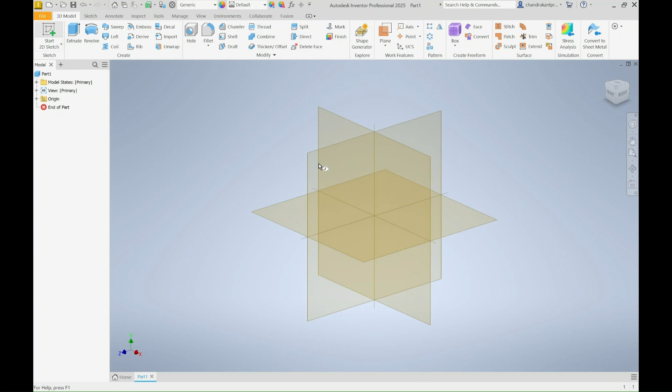We will start from here. First of all, we will make its base 40 and 60. Start sketch. 2-point rectangle. 40. Sixty. Enter. Zoom out.

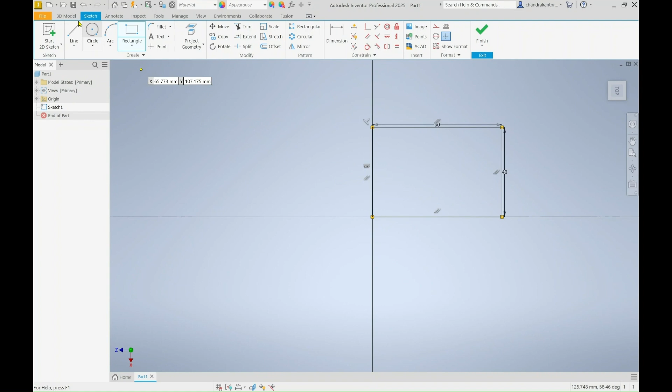Now we're going to extrude it. For extrusion, it's 10 mm. Now we have to make this at the center 40 by 40 square.

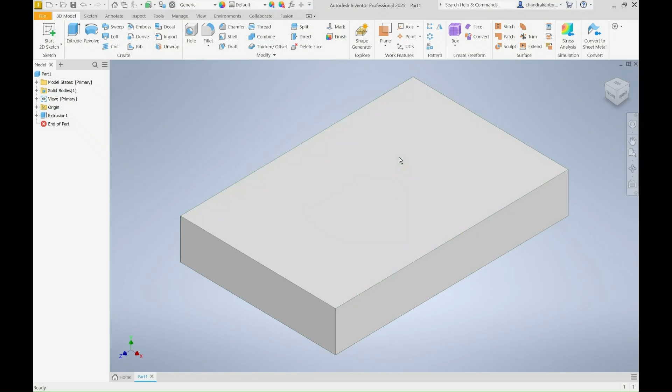Pick this plane, create new sketch, two-point rectangle. Just make a rectangle first of 40, tab 40. Now take general dimensions, take this, zoom in. It needs extrusion of 20.

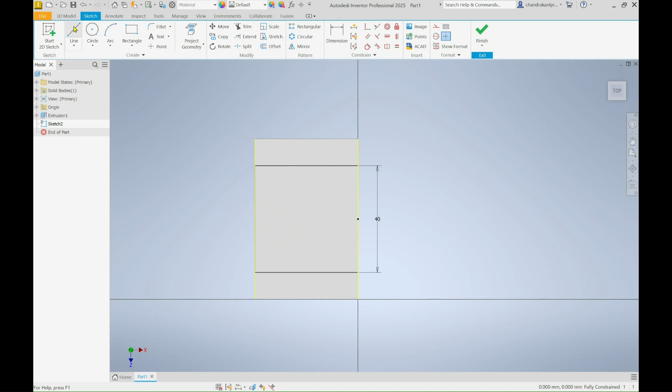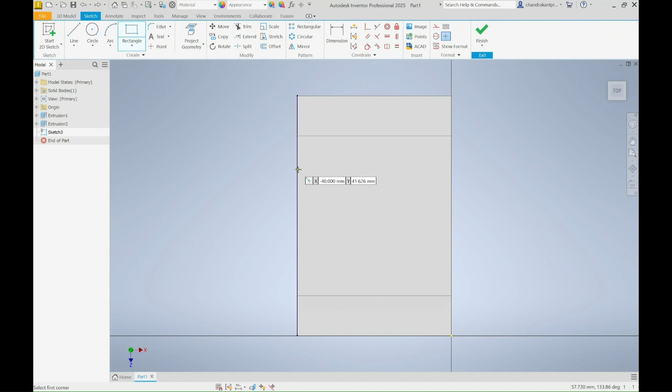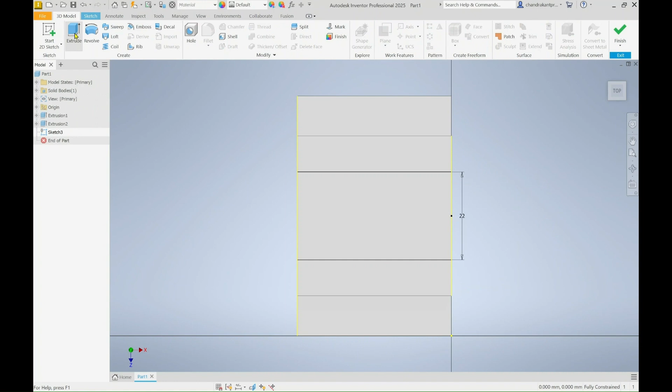Select this plane, create sketch, tab 22, enter. Okay, take dimensions, make this into middle. Extrude, cut. We are going to cut this 15.

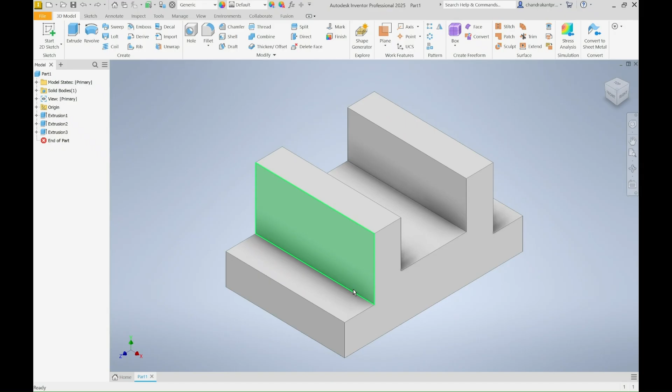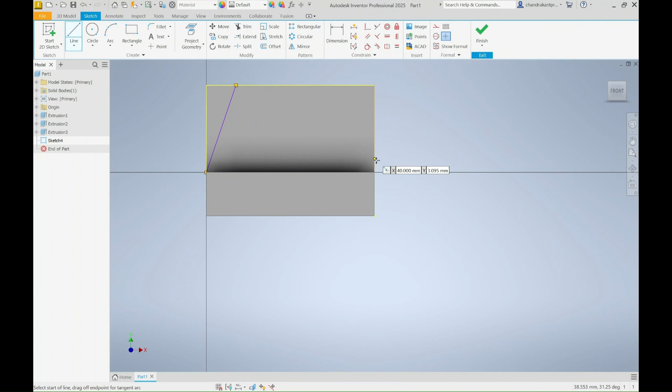Now we can make these cuts, we'll just simply place here and here. Okay, start sketch. First of all, we are going to project geometry this and this. Okay, take a line, take the dimensions from this to this, it's 10. From this to this, it's 20.

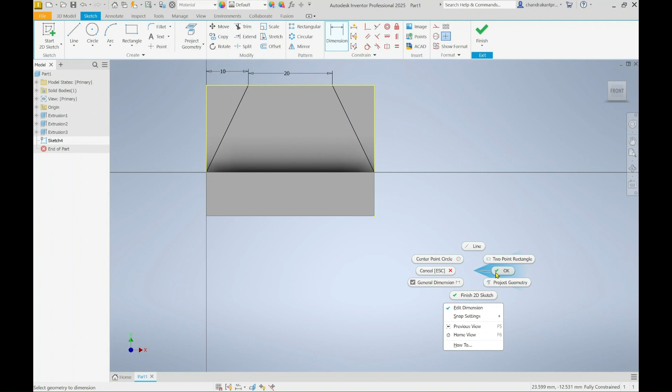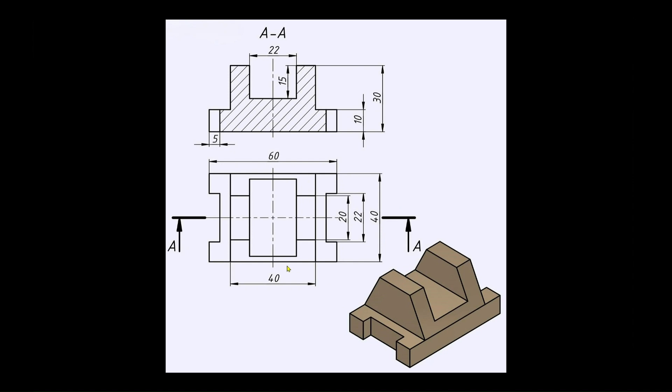Okay, now we'll choose extrude. We will take this and this, cut this, take through all, and it's done. We're going to take this cut also. It's 22 by 5 mm. Okay.

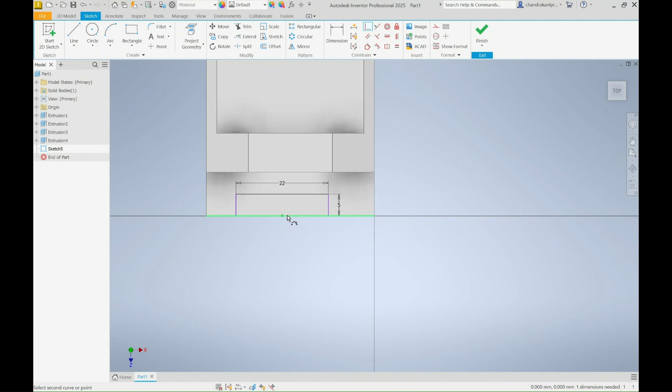Take 2-point rectangle, 22, tab, 5, enter. Take this tool, coincident constraint, again, okay. Go to 3D model, extrude, cut, through all, okay. And now we don't have to do all steps from this side.

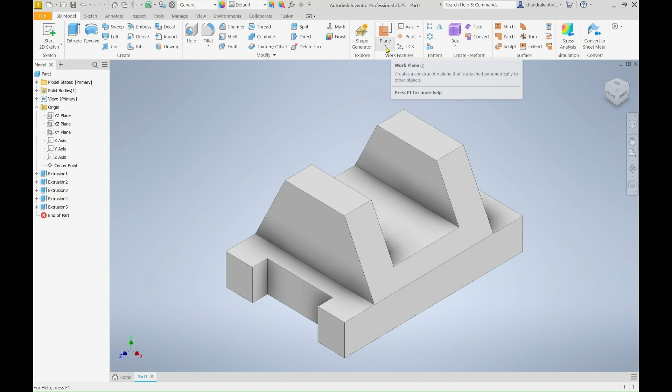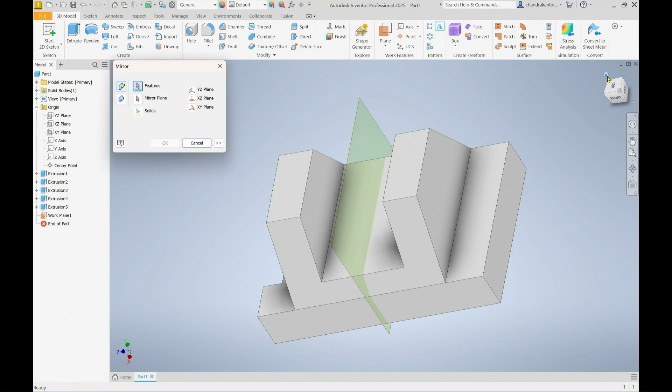So we are going to take this plane, midplane between two planes. We are going to choose this plane and this plane. Here is our plane. Okay. Just take mirror command. Just take this feature for mirror. Choose mirror plane. So if you can see, it's projecting. Okay, we are going to get this.

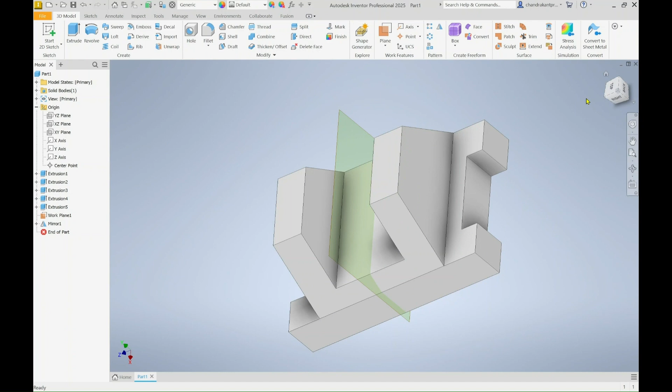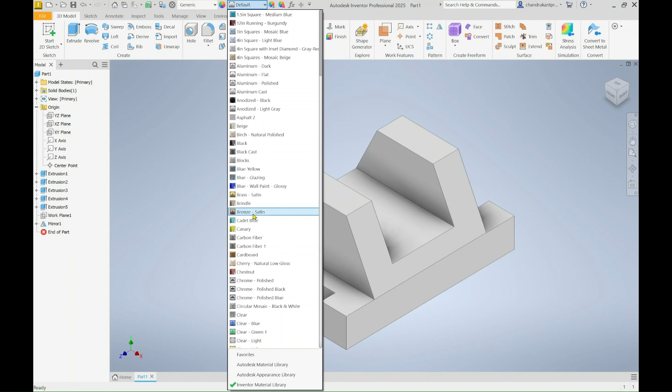Now our drawing is complete, but here is its plane, which is looking weird. So for this, we can turn off its visibility. So in this exercise, we learned plane, mirror command, and we learned a little bit of project geometry and some create tools.